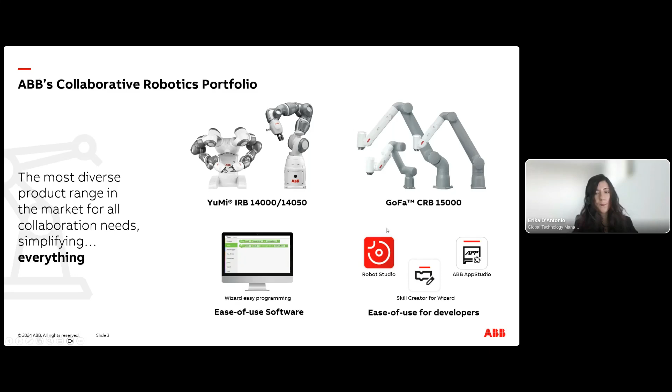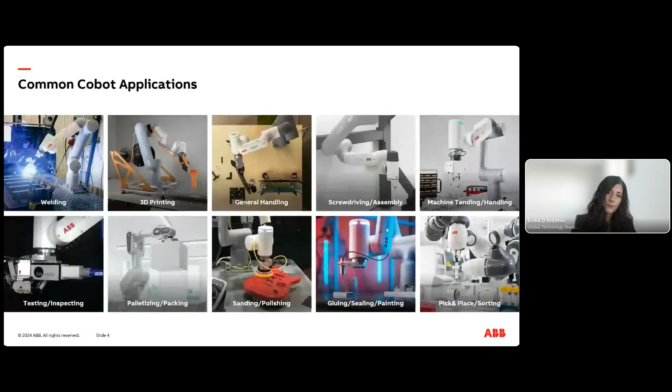But let me explain better what the ecosystem program is. First of all, what is an ecosystem? We often hear this word, but what does it really mean? Many people, especially from robotics, associate this word with something connected to nature. This is true, because according to National Geographic, this term represents the geographic area where plants, animals, and other organisms, landscape and weather can work perfectly together to form a bubble of life.

So when it comes to robotics, it's not really that different, because in robotics this term refers to interconnected systems of robots and different technologies. So as for nature, the robot will interact seamlessly with accessories, software, and technology to perform complex tasks efficiently.

If we look at the ABB Robotics ecosystem, it will provide you with everything you need in order to perform every kind of application. Since the demand for robotics automation is rapidly increasing, but it's not so easy to build a complete robotic application, even if you are an expert, the ABB robotics ecosystem will help you do exactly that.

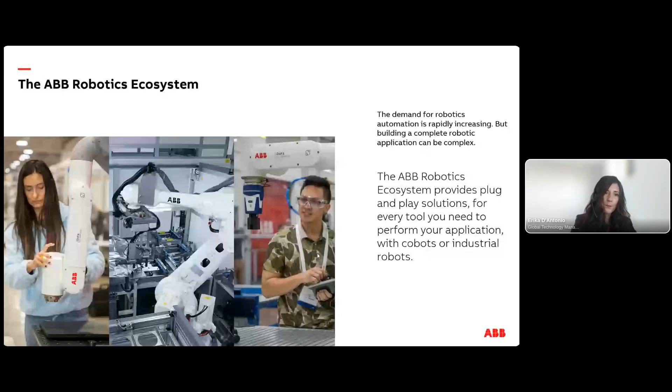So what we want to do with you is really to drive efficiency together with you. We want to reduce installation and commissioning time and address challenges in automation.

Every tool you need to perform your application will be so easy to install that you won't need to spend a long time installing everything. Sometimes even experts need so long to install and make every accessory on the robot work. Through the ecosystem, this will not be your case anymore.

So you will save a lot of time in installation and commissioning. We want also to get rid of the fear of automation and make robotics more approachable and less intimidating while improving production. And finally, through the ABB Robotics ecosystem, we are bringing value and quality to your customer or in your production.

We will go deeper later into understanding what an ecosystem product is, but let's see what's in it for you. If you buy an ecosystem package, you will get all the hardware you need to quick install and make the product work, including the main device, clear documentation, cables, screws, and adapters for easy installation.

You will also find the software package, that in ABB is called add-in, which will allow you to program and make it work for the gripper. As well, you will get an interface to simplify operation.

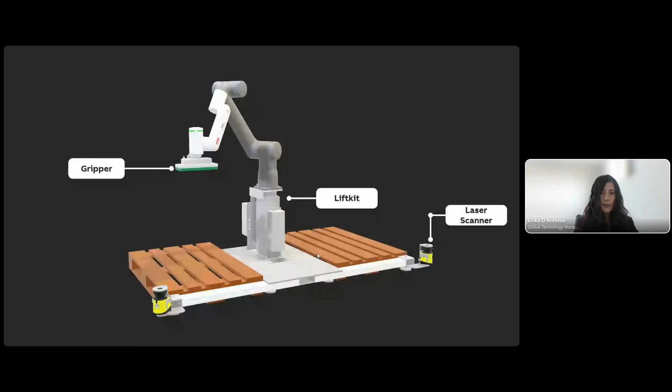Let's now understand better what an ecosystem product is. If you look at a robotics application, like in this palletizing example, you have the robot itself, but the robot alone cannot do everything. So you will have, for example, a gripper, a lift kit, a laser scanner, a software package, and other tools that need to be integrated with the robot.

Every one of these single tools represents one ecosystem product. If we focus on the laser scanner, which is the focus of this call, in the laser scanner ecosystem package you will find the device itself, the screws and cables you need to mount the laser scanner on your application workstation, and all the cables needed for communication between the laser scanner and the robot controller.

You will also have documentation that will lead you through the installation process step by step, and pre-configured software in order to speed up the installation process.

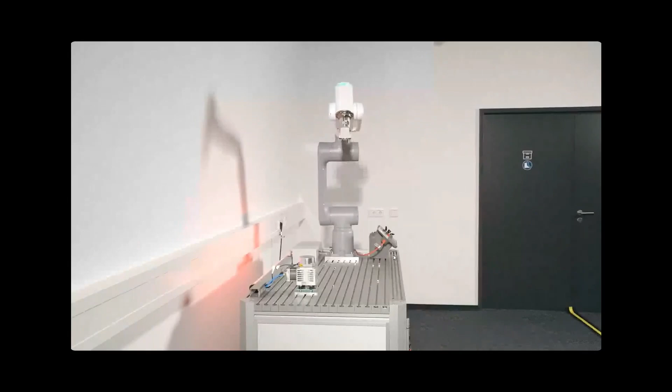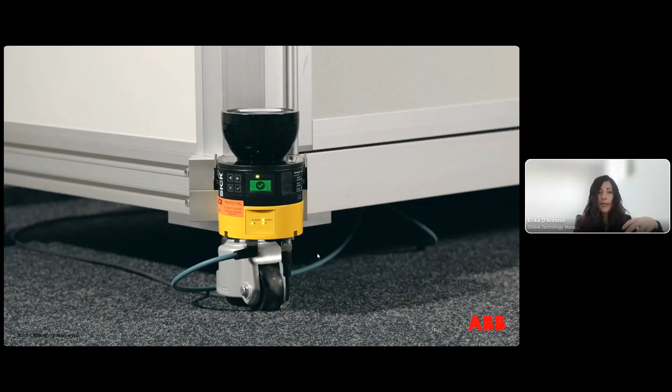...the software package and the laser scanner ecosystem kit for GoFa looks like, but later on the Sick colleague Marco will give you more details.

Let me add that if you visit our ABB Robotics ecosystem website, you will find two categories of products: compatible products and recommended products. What is the difference? Recommended products are easier to install and operate.

Recommended products are ideal for all users, and it will take only a few minutes to install and deploy the device. Instead, compatible products can also be integrated with ABB cobots and robots, but they are more complex to install and operate, so they target experts and system integrators. Both categories are validated by ABB via the ecosystem validation, but recommended products offer faster deployment.

And this is how the ABB GoFa safety kit from Sick looks. We say from 8 hours to 25 minutes, because previously it took 8 hours to set up the laser scanner, and now it will take only 25 minutes, thanks to this kit that includes all the needed cables and brackets for installing the laser scanner.

You will also have all the software elements you need for easy integration and configuration, as well as new innovative software that can automatically scan the safety area, excluding fixed objects. This product is available in 4 variants tailored for cobots.

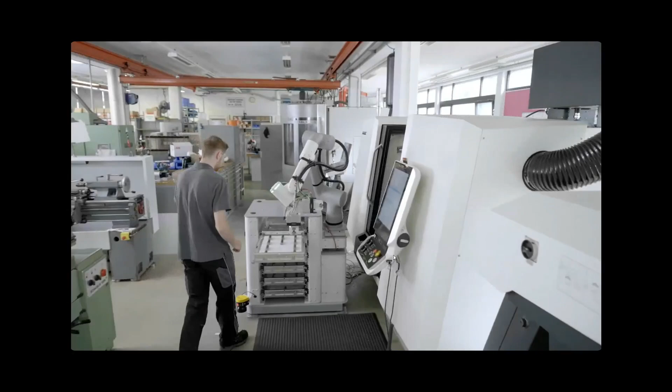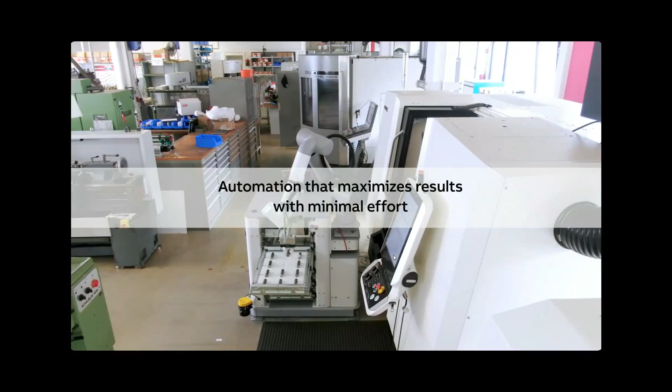The scanner is part of ABB's Robotics ecosystem, delivering efficiency and ease of use. But now, thank you for your attention, and I'll hand over to my colleague Marco.

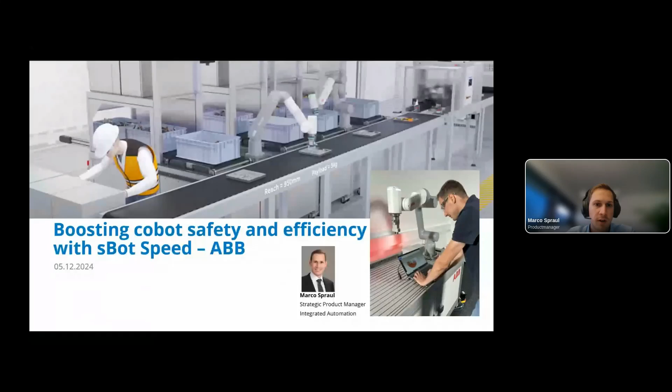My name is Marco Spraul, and I'm product manager at Sick, responsible for the sBot Speed safety system, which we developed together with ABB.

What we developed exactly with ABB is a configuration tool software with combined and optimized hardware, as you can see here in the picture on the right. This configuration tool software allows you to configure up to 2 laser scanners in an easy and intuitive way for your ABB robot applications.

We are supporting 2 interfaces here. One is Profinet and the other one is PRO I/O.

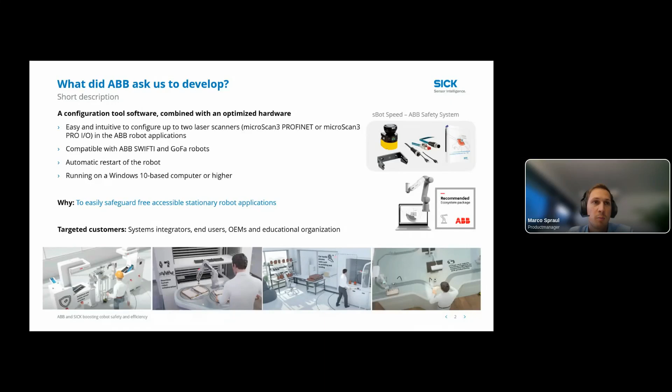And we are compatible with ABB SWIFTI and GoFa robots. At the end, we are allowing with our software an automatic restart of the robot, which is increasing your productivity in the field. Our software runs on a Windows 10-based computer or higher.

What we are targeting with our system are free accessible stationary robot applications, as we can see in the pictures, where people can have free access to the robot and walk in, for example, to do a quality check, or for bringing new parts so that the robot can continue with its work.

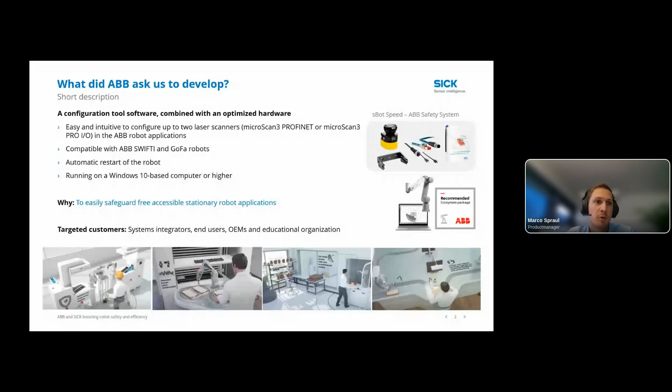Quickly, some words on the safety system. What exactly is a safety system? A safety system consists of hardware - there's the laser scanner, mounting brackets, as well as cables - as well as the software. Here our Microscan 3 configuration tool, ABB, and the operating instruction, which explains how to use the software.

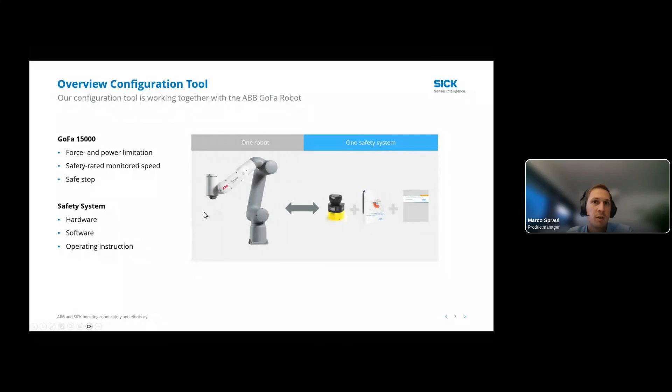In addition, we are using different functions of the Gofa robot, like the force and power limitation, the safety rated monitor speed, and also a safe stop. How this is working, I'll show you in the next slide.

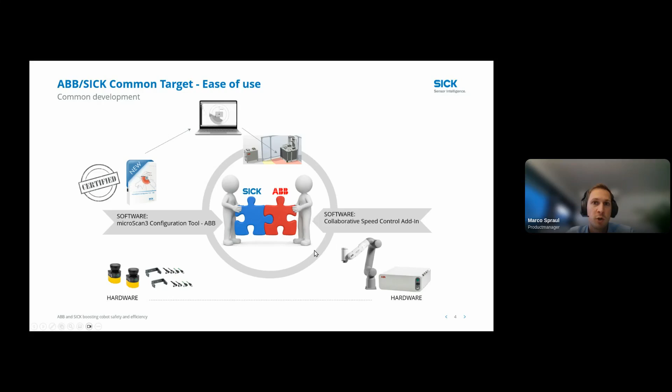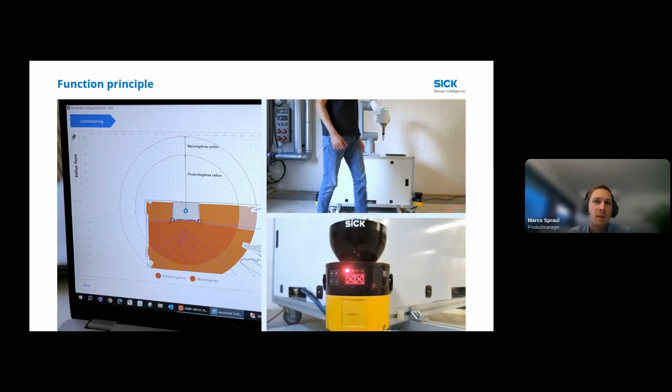As I'm getting a bit closer to the robot, it will slow down. When both fields are infringed, the robot will stop. Here there's only one field infringed, so the robot will slow down. As soon as I'm getting closer, the robot stops, so I can check. And if I'm walking out again, the robot restarts automatically without pressing a button.

And then I would say we can directly jump to the live demo.

So for the live demo, for starting the robot and the laser scanners, of course we need to mount the laser scanners on the robot table and make sure that they are connected in the correct way and according to the operating instruction of ABB to the robot controller. We need to make sure that we have power supply for the laser scanners.

We also need to make sure that the safe move template is installed on the robot controller, and this can be done via the FlexPendant. And so far for the IO interface, there are no steps in Robot Studio needed anymore, which allows a super fast integration.

And for the Profinet interface, we are working at the moment on templates, which will be released in the next 1 or 2 months. Therefore in the future, there will be no further steps in Robot Studio needed for both interfaces, which allows again fast integration and more productivity at the end.

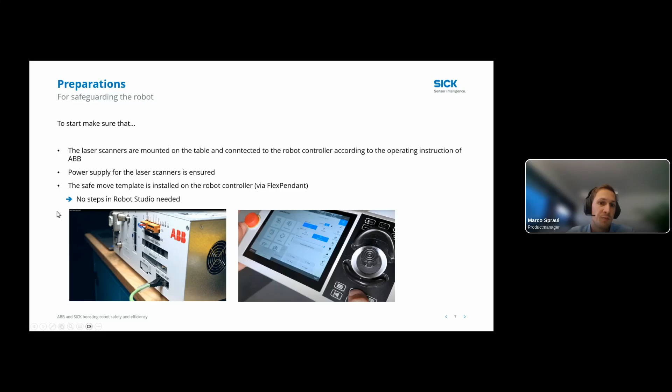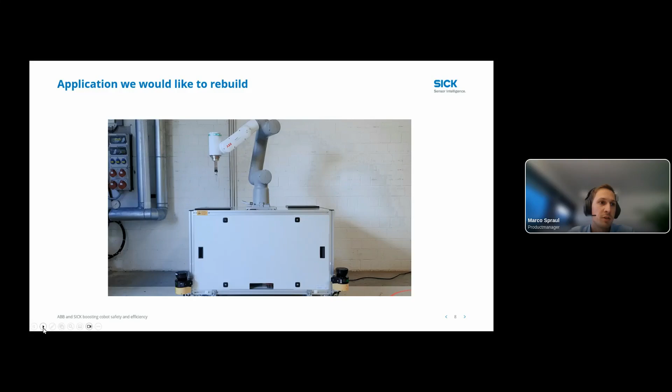And in the next step, we then can jump into the configuration tool. I did the video here since it's always a bit loud in our robot lab, and therefore I recorded this.

So here we are in the user interface right now, and then in the next step we can log in, in order to set up our configuration.

And now we are in the user interface, and what we can see now here on the left side is the coordinating system in millimeters, and also on the top side. In the middle, we can see the robot desk as a rectangle. R represents the robot, and A and B are the laser scanners.

In addition, we have a menu toolbar on the left side with different menu icons where we can set up different settings. So in the next step, for example, we can set up the size of our desk here, our robot desk. This is already correctly predefined in our case.

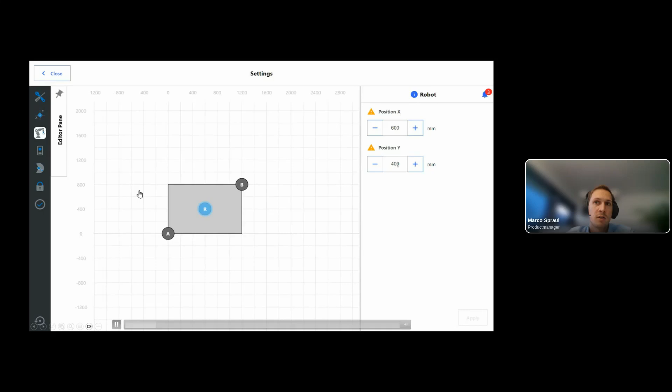So therefore, we can then jump into the next step where we can define the position of our robot. We took measures beforehand, so our robot is now a bit closer to the edge. And then we can simply take over these values with apply.

And we can do the same with our laser scanners in the next step. As soon as the laser scanners are correctly connected to the robot controller, they are automatically found by our tool. And then you can select them and allocate them to the corresponding position here.

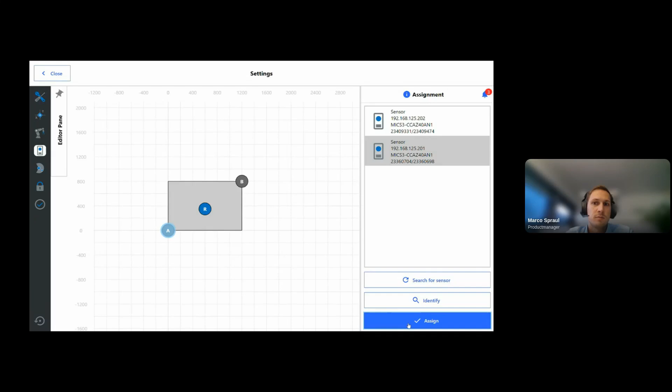As soon as this is taken over, we have to type in the sensor password due to cybersecurity reasons. Then we can define the position of our laser scanner. Here we are next to the edge or the corner of the robot table.

So we are taking -50 and -50 for X and Y, and then we can also define the rotation in degrees. This small arrow shows us where the laser scanner is looking. We are selecting 135 degrees, and now the laser scanner is looking to the left side and the bottom side of the table.

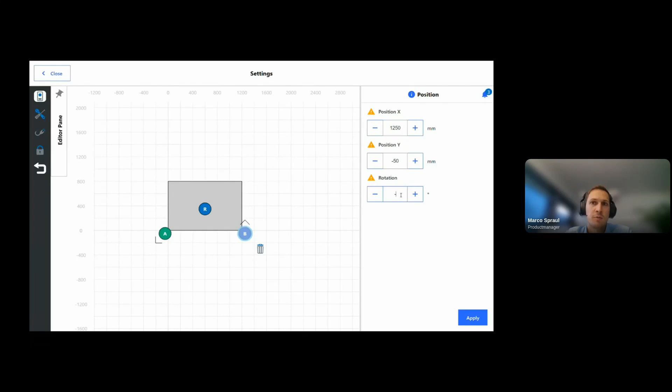Then we can do the same thing with laser scanner B, assigning it to position B and placing it in front of the table with the position X and Y. We also make sure that this laser scanner is looking to the right side of the table and the bottom side of the table.

Now, as you can see in the picture, we have rebuilt our application, and therefore we can go to the next step: setting up our protective fields around the robot. We go back to the main menu and select the next menu point.

We have here two kinds of field modes. In our case, we are selecting the robot-centric mode. Regarding the free fields mode, I will say some words later on. With the robot-centric mode, we have circles around the robot as protective fields.

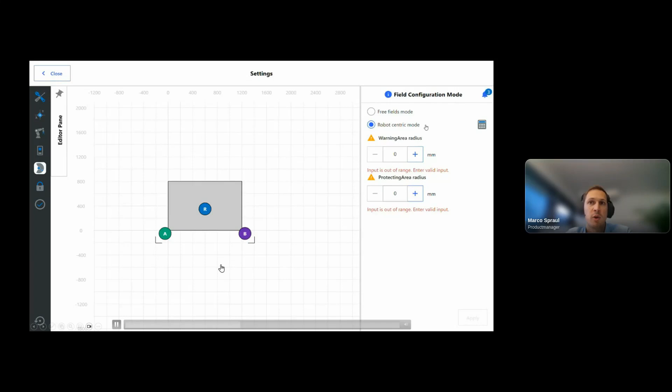In our case, we now have two protective fields: one is the so-called warning area radius, and the other the protecting area radius. In addition, we also have a calculation guide implemented in our tool, which allows you to calculate the correct safety distance according to the standard.

We have some values grayed out, for example the approach speed, since this is fixed according to the standard. But of course there are also some values that are not fixed that you can change, for example the supplement for the tool when you have a gripper installed, and also for the workpiece. But due to time reasons, we're not going further into details here.

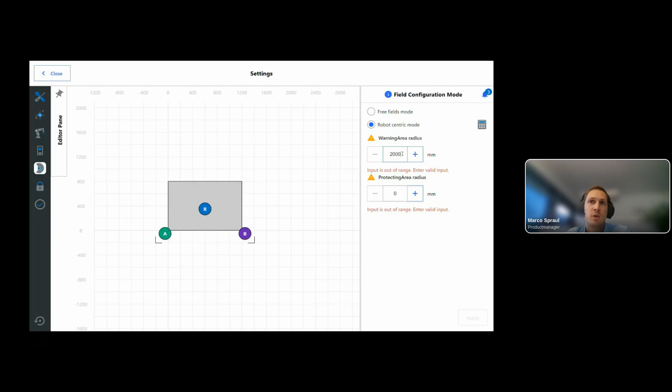So we are selecting 2000 millimeters for the warning area radius and 1600 for the protecting area radius. Now we have two protective fields around our robot, and with apply, we can take over the values.

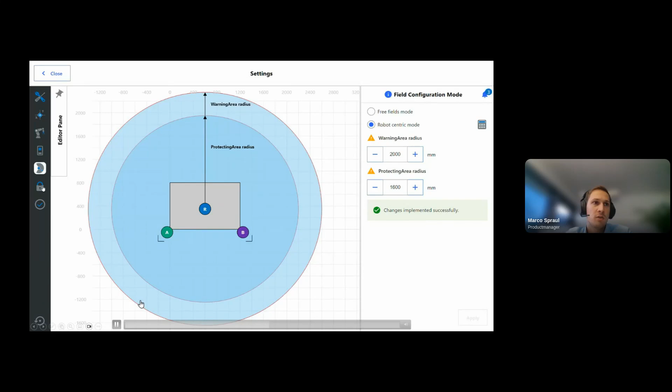In the next menu icon, we can set up some password settings and also define different users if you would like to, but here we continue.

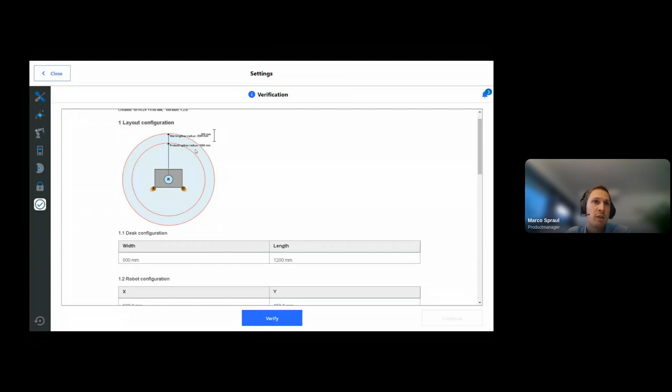We can go to the next step where we verify our settings. So we are seeing here again, for example, the position of our robot, the size of our desk, the size of our warning area radius and protecting area radius, etc. And if everything is fine, we then continue and click on verify.

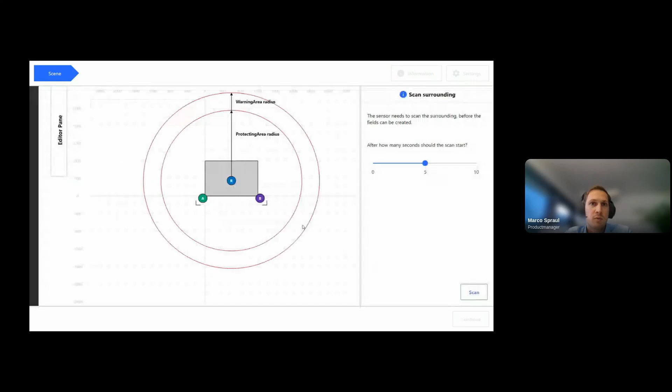After that, we can jump into the next menu where we scan our application environment with our laser scanners. On the right side we have a toolbar, and there we can select after how many seconds the scan should start.

So if we are standing in the application area, we can walk out during this time so that we are not scanned by the laser scanners. Here we are not standing in, so we can select 0 seconds.

In addition, the fields are also automatically split up between the two laser scanners, so you don't need to care about this either.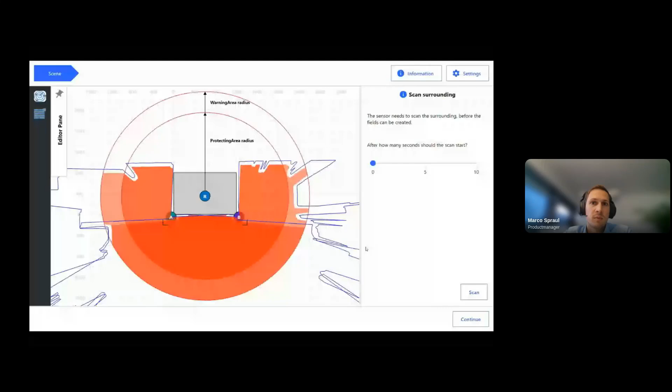And as another function... oh, sorry for that. I just go back to the point.

As another function, we have also implemented an artificial wall function, and this one allows us to hide some application area which we don't want to observe.

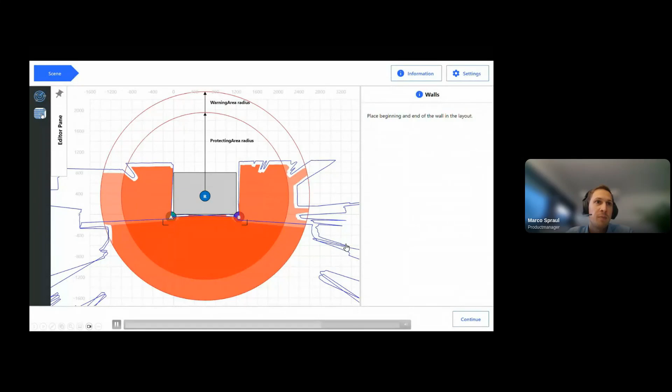For example, when you have some fences installed in your application surrounding where the laser scanner is looking through, or some plexiglass, you can simply hide the area behind it, and then that area is not observed anymore by our laser scanners and doesn't trigger any robot functions.

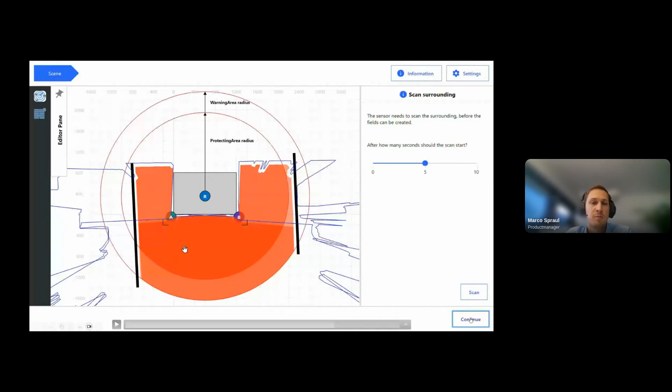And if this is fine, we can simply click on continue, and then we can download the configuration onto the laser scanners.

In the next step, we are seeing again our live scanning data in blue, and also our scene we just have modified here. On the right side, we have a commissioning interface with safety relevant measures.

Of course, this does not represent a risk assessment, but it can rather be seen as a guideline. We would like to give the end user a good feeling, because when it comes to safety, a lot of people often struggle and feel unsecure with it. Therefore, we have different checkpoints.

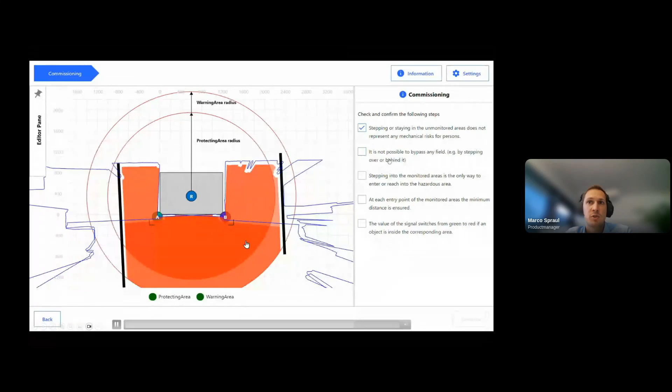For example, the first one, stepping or staying in unmonitored areas, does not represent any mechanical risk. Or the second one, it's not possible to bypass any field, for example by stepping over or behind it. Only if you're checking all 5 steps, you can then continue.

In addition, for testing, we have also implemented the OSSD signals here. In our case, they are both green, so we are not standing in the protective fields here.

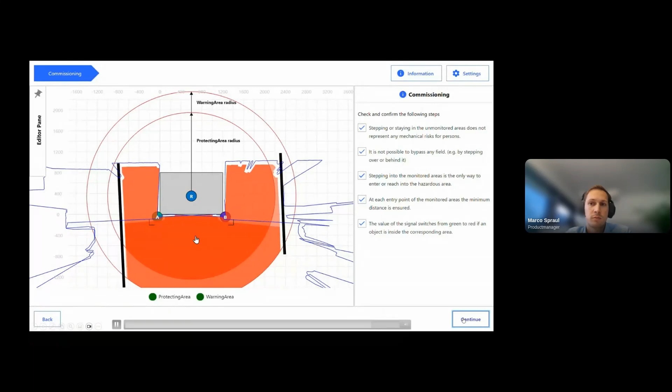After continue, we can go into the verification report, and then we can activate the safety with our user signature. So we can see again all the settings we just have done, as well as the protective fields here. On the left side, the radius of our warning area and the protecting area radius.

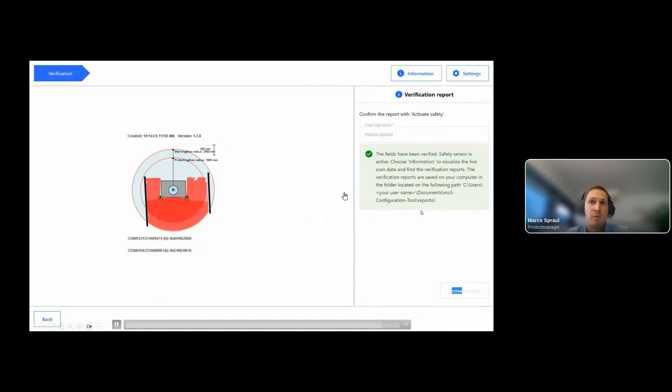If everything is fine, we can then click on activate safety, and this allows us to start the robot. In addition, our verification report is then stored on a C drive in our computer.

As you have seen now, the configuration of our laser scanners took less than 10 minutes, which allows you to increase your productivity in the field, since you don't have so much setup time anymore, and allows you to have more production time at the end, which is super nice.

With that, I would quickly jump back to the presentation to explain a bit more about different features of our tool.

Quickly to the modes of application. What we just have seen is the so-called intermittent collaboration mode here on the left side. Here we have 2 protective fields around our robot. The outer field is used to trigger the so-called speed monitoring, so the robot will slow down.

As soon as a person is getting closer to the robot and infringing the inner field, the robot will stop, and therefore the standstill monitoring is triggered.

Whereas on the right side, we have the so-called cooperation mode. This one is only available for the GoFa robot. Here we have 1 protective field, and as soon as this field is infringed, the robot slows down its speed to a cooperative speed, and then the force monitoring of the GoFa robot is activated.

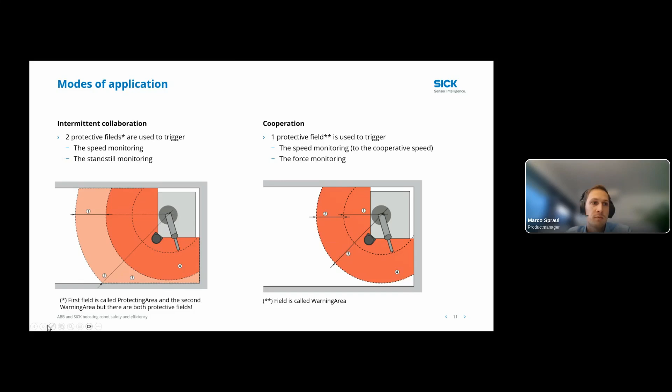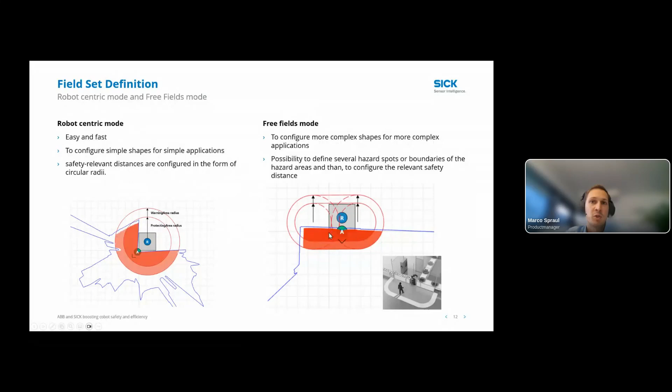What we are doing here is simply putting some circles into our application environment. Here we have 3 circles in total, and of course we can also define the size of these circles. Then afterwards, the circles are getting automatically connected to each other to protect the fields.

And the fields are also teached in here, as you can see, including the live scanning data. So you don't need to take care about this anymore - everything is done automatically for you.

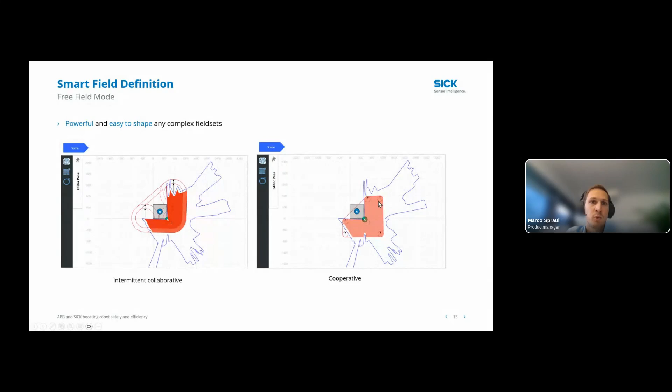And that's it with my presentation. Thank you very much for your attention so far.